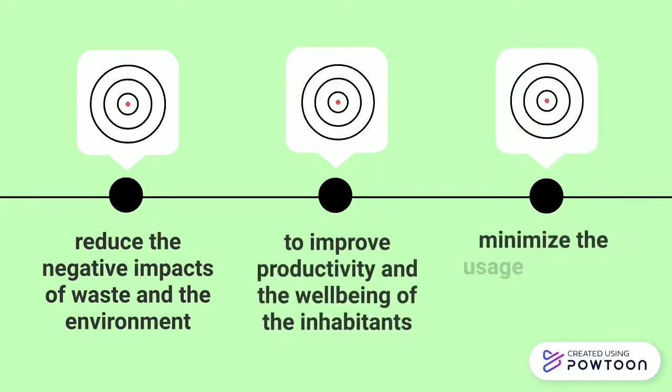In this presentation, we would like to talk about the valuation of green building. The notion of green building is very important to avoid worse natural disasters. The key goals of green construction are: first, to reduce the negative impacts of waste on the environment; second, to improve productivity and the well-being of the inhabitants; and lastly, to minimize the usage of energy.

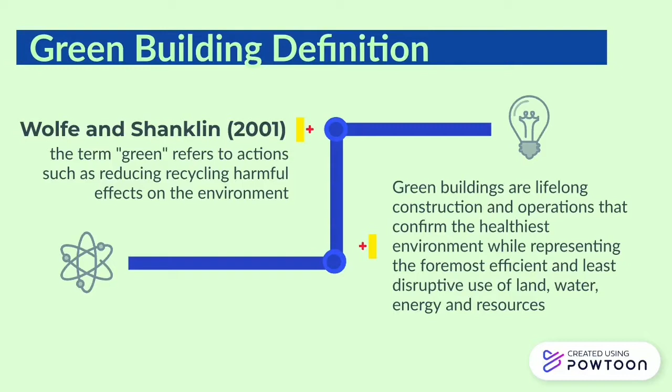Green building is defined by Wolfe and Shanklin in 2001 as the term green referring to actions such as reducing and recycling harmful effects on the environment. Green buildings are lifelong construction and operations that confirm the healthiest environment while representing the foremost efficient and least disruptive use of land, water, energy, and resources.

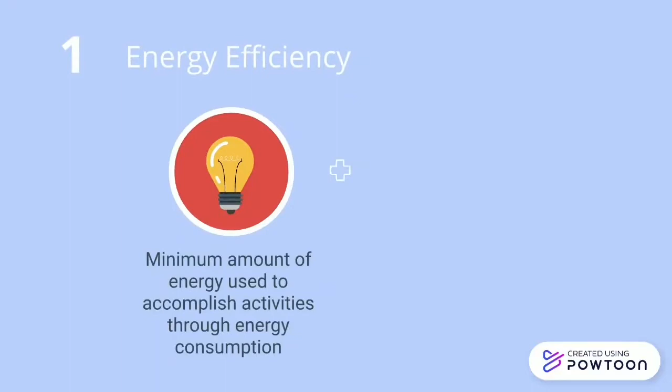Now we move to the literature review. There are 5 criteria of green building by GBI Malaysia. First, energy efficiency: the minimum amount needed to accomplish activities, and the most famous aspect focusing on green building.

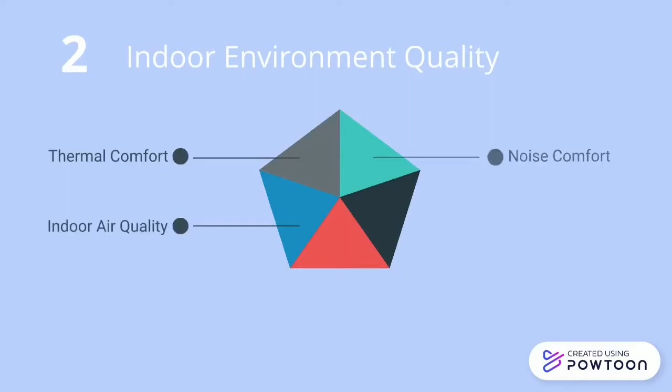Second, indoor environment quality, which includes thermal comfort, indoor air quality, noise comfort, and lighting, objectives aimed at reducing harm to human health. Third, sustainable site planning and management, to implement proper construction management with two requirements: site planning and transportation, and site construction management. Fourth, material and resources, using eco-friendly material, and lastly, water efficiency and innovation, to minimize water usage and reduce wastewater to meet the objectives of GBI.

The tangible aspect helps to increase the building value. The building must be in a good position, capable of attracting people, commanding higher quality tenants, lower tenant turnover, and high demand from investors. In this case, green building can stand out from its peers and lead to a better value yield: a healthy building.

Since the concentration of pollutants indoors is higher than outdoors, green building can prevent sick building syndrome. This is because the green features in green building can reduce mold growth and only use low-emitting materials.

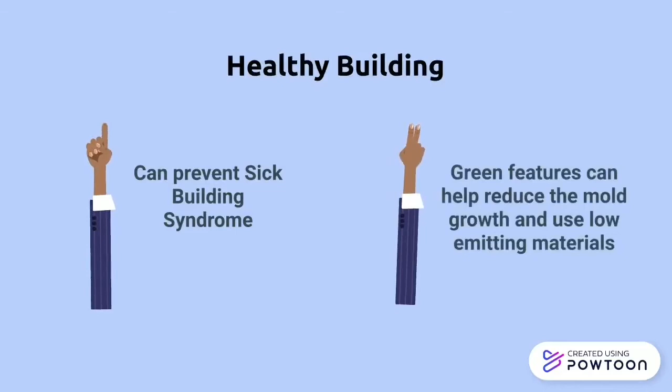In conclusion, since green building has been developed in a few countries, professional bodies and valuers should explore the value perception of the green features in green building due to steadily growing interest in sustainability issues.

Moving on to our case study. The title is Green Building Valuation Issues and Perspective. Green features can affect market value. In a green building, green features are used from designing until demolition to conserve the environment and make it more sustainable.

In valuation, there are 3 approaches that can be used to value a green building. First, the comparison approach: appropriate to use, but it is difficult to find comparable properties. In the cost approach, the production cost and the estimated depreciation of the green building is needed, however some forms of accrued depreciation might be lower for green improvements. Lastly, the income approach: green buildings are built to reduce costs such as operating costs, maintenance, and repair, and this cost reduction gives a big impact on the net operating income of the building.

The next case study is green building valuation from a valuer's perspective. The study was conducted in 2011 but still remains highly relevant to this day. Green building development is still new in Malaysia, and valuers do not necessarily consider green elements in valuation, but are slowly but surely finding the need to incorporate them, as green elements should increase the value in comparison to a conventional building. There are many elements in assessing green buildings that should be taken into consideration.

First of all, the major differences, which are rental per square foot, outgoings, yield, and also capitalization rate. These figures differ from typical buildings and will have an impact on the market value. Even so, rental in Malaysia is still purely driven by demand, and the mentality of tenants is: why should they pay more? Their emphasis is highly based on the location factor.

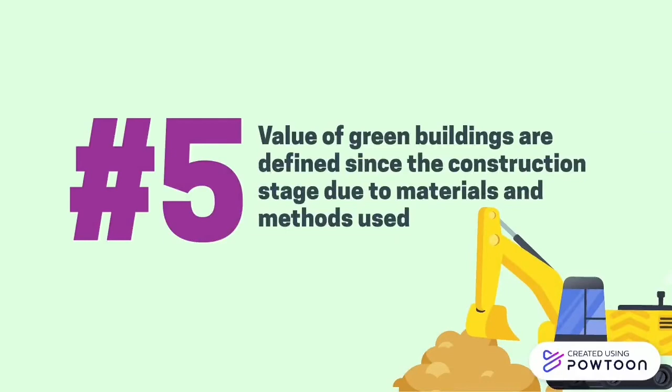Furthermore, the value of green buildings is defined since the construction stage. They incorporate sustainable methods and materials, which have a huge effect on the construction cost itself.

Other than that, government intervention from either federal, local authority, or state government through handing out incentives and tax exemptions will play a role. BOVAEA, as the professional body, needs to make a stance and standardize factors to ensure valuers include these green elements, and that valuers define them all using the same drivers and basis.

Additionally, there needs to be an explanation on the different types of certifications such as GBI and LEED, which focus on different tools in their assessment and also possess a few different levels of certification, starting from bronze all the way up to platinum.

In conclusion, green building uses environmentally friendly materials to protect and conserve the environment. These materials give a positive impact to the value and are rated by the Malaysian system known as Green Building Index (GBI). Next, usage of eco-friendly technology will give a long-term impact on nature. Green components reflect the added value of a property as opposed to a standard traditional building. Green buildings can also provide environmental, economic, and social benefits.